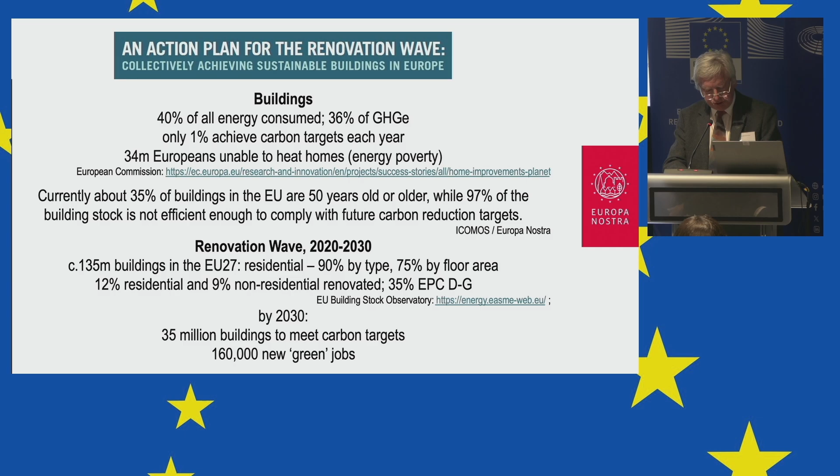I want to give an example. I trained as an architect, worked as an architect, worked on urban regeneration, worked on a reasonably wide range of projects. But my frustration as an architect was that I needed a client who had empathy with what we were trying to do, and quite often that was missing. So eventually I crossed the fence to become the client, and tried to change things from the other side. This is an example where I felt the role of architects as creative industries—and perhaps you don't think of yourself in that sense—but as enablers, people who can see beyond the horizons of contracts and projects, people who can see the future, who can see what is possible.

York is an example where you'd think—York has one of the highest densities of protected buildings in the UK—you'd think surely York, we don't need to discuss York, it's going to be all right, isn't it? Well, no. The survey we did looked at the use of this conservation area and the individual protected buildings.

What we found was that about a third of the upper floors of these buildings was either underused or disused altogether. You think, hang on a minute, surely it's where everyone wants to be—the economy, the culture, the community. But the nature of the buildings was such that the physical constraints and the way buildings are valued was an inhibitor to progress.

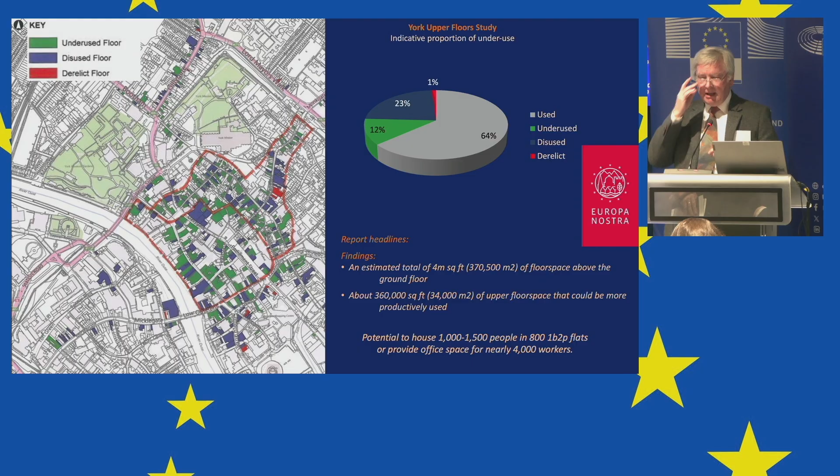So the first point to make is that the buildings have 90% of their market value at ground floor level. That's where the money is earned. So if someone is leasing a building, 90% of the value is at the ground floor and only 10% on the upper floors. So where's the incentive to invest in the upper floors—not just in terms of their use, but in terms of access and all the other things that go with that?

The other barrier we found is that, broadly speaking, the property commercial world is divided into residential and non-residential. And so the commercial world, which is driving the ground floor future, isn't interested in residential, because it's a conflict of two different types, two different communities, two different ways of valuing, two different types of tenure. It was a real problem to try to persuade the market agents to reconcile that differential, to unlock the potential of the city centre.

As you can see at the quote at the bottom, what that meant was that if we could bring that one third of floor space back into use, then we could accommodate between 1,000 and 1,500 people, or we could create employment for up to 4,000 people. These are not small numbers.

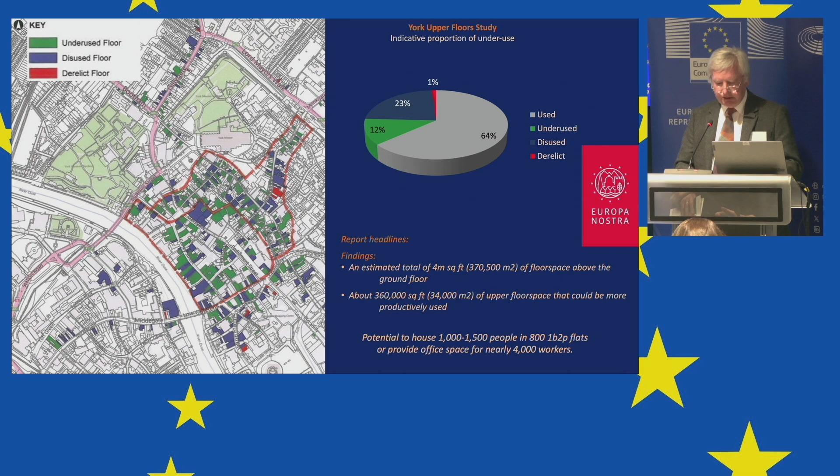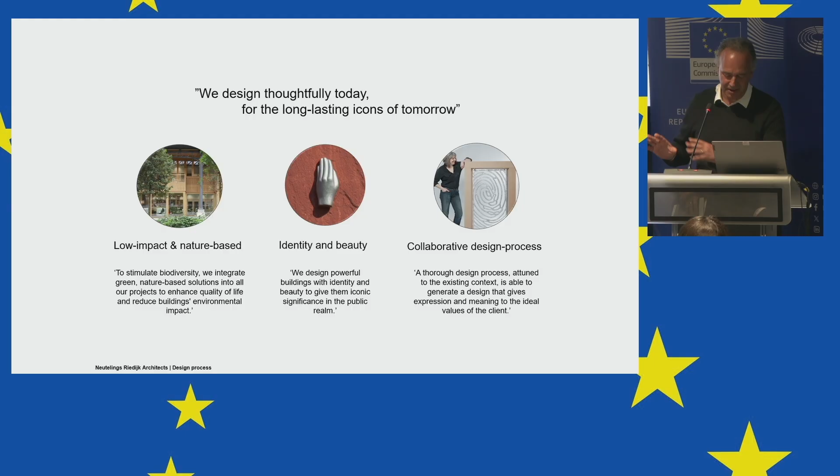I am not going to explain this, since I got the instruction that I had to keep a very limited, concise lecture and speed up.

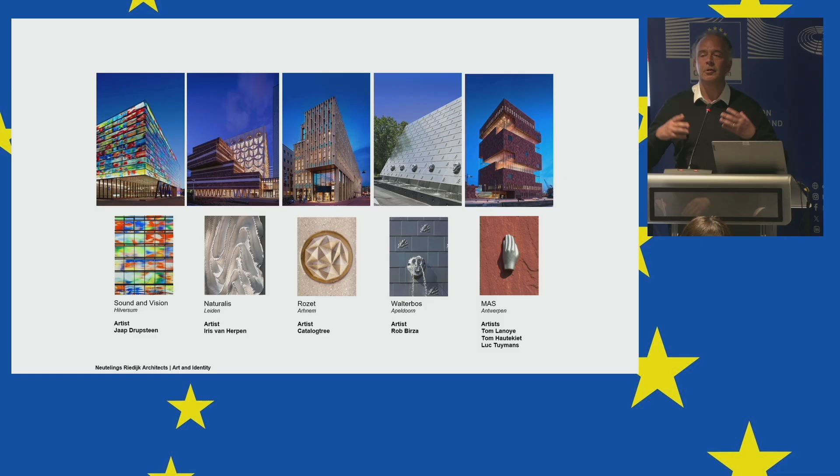So I'm also not going to consider these buildings, which are all new and all about collaboration, in particular collaboration with artists, poets, and other professionals from other fields of expertise, in order to make a building that is grounded in its particular place on Earth.

And it was already mentioned before, also by Olaf in his speech. I think it's key that a building is grounded on one particular place on Earth, and art, poetry and other expertises can help us with that. I'll try to show you that in the coming slides.

Next to that, there are all kinds of ambitions related to what repurposing and adaptive reuse might bring. What is key for us is that the building you find as an objet trouvé, the found object, brings another quality that you couldn't have designed yourself. The objet trouvé propels your thinking in a completely new manner, and offers you design questions that bring you to another level of quality and another level of thinking about architecture in general.

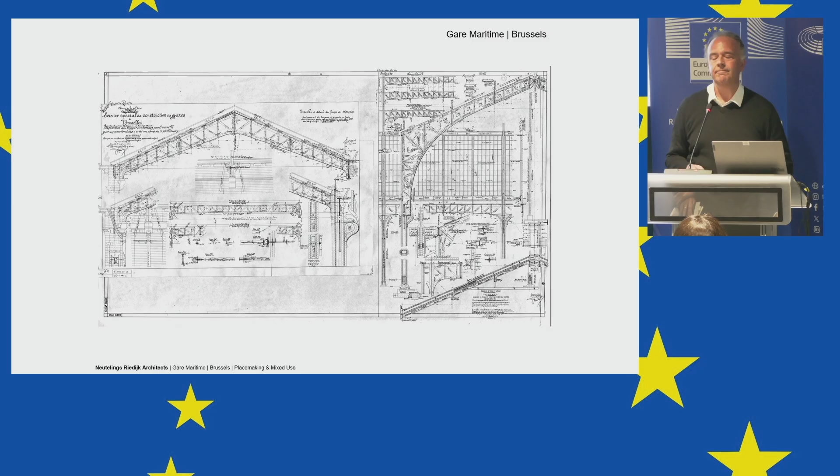As you might know, the Treaty of Maastricht came into power, and there was no reason to have customs declarations anymore for goods shipping into the heart of Brussels by train. So the Belgian Railroad Company decided to sell this former shunting yard and get rid of it, because the ground was polluted, the buildings were in a very bad state, and eventually they didn't know how to use it.

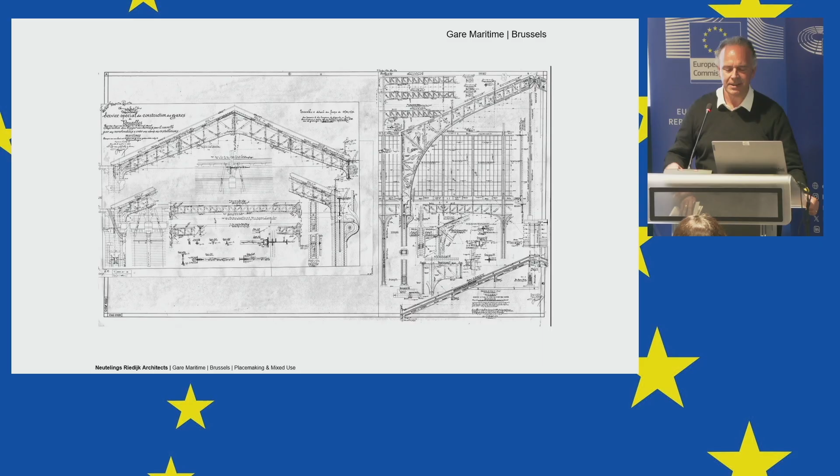So the whole premises is a vast site in one of the most difficult areas of Brussels. That is an important detail you should take into account - I will get back to that. After 1992, nothing happened in this building, so it was in a very, very difficult state.

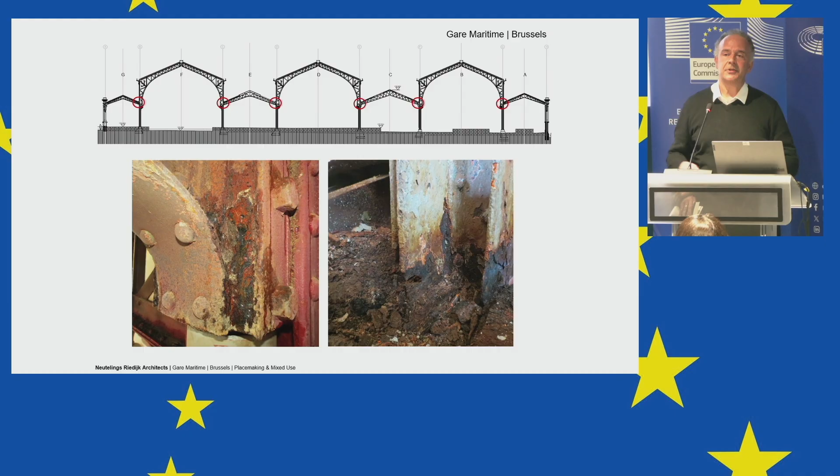The company who obtained the premises from the Belgian Railroad Company is called Nextensa. After years developing other parts of this former shunting yard, they decided not to demolish the building, even though it was considered to be completely demolished, and they started renovating it.

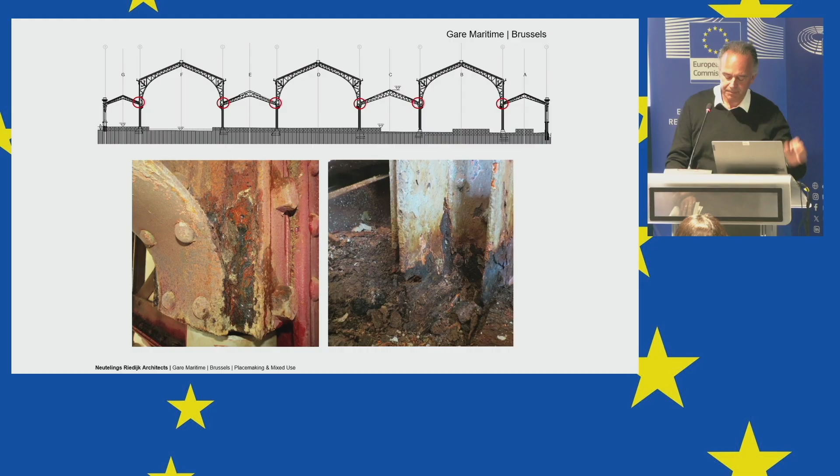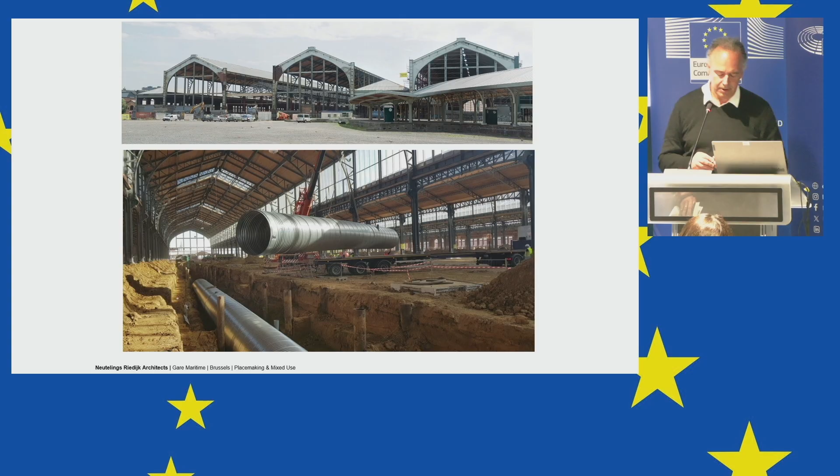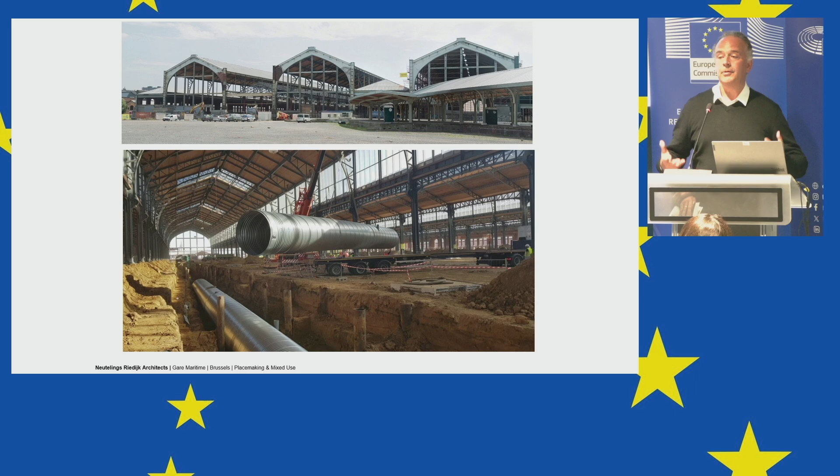Of course the renovation was quite difficult and costly. Since the cast iron structure was very well engineered, the building could not support any additional weight. As you all know, timber is five times lighter than concrete, so eventually, after being asked and winning a selection, we decided to execute everything in full timber, allowing the existing structure to remain without any reinforcement to the existing foundations and structural work.

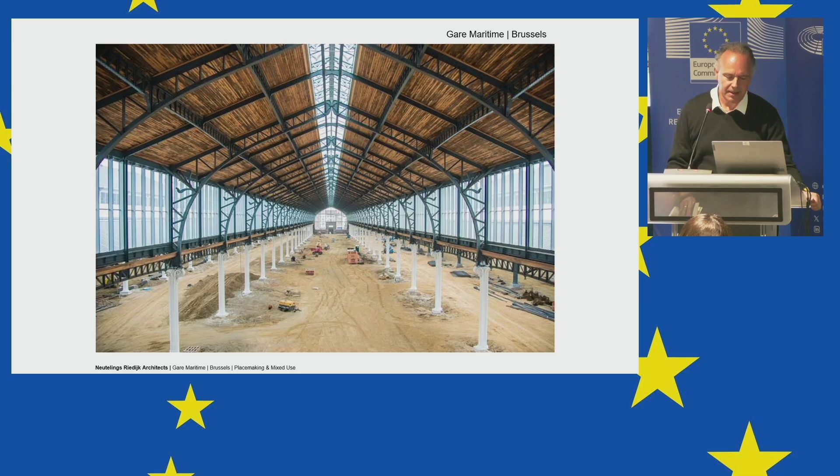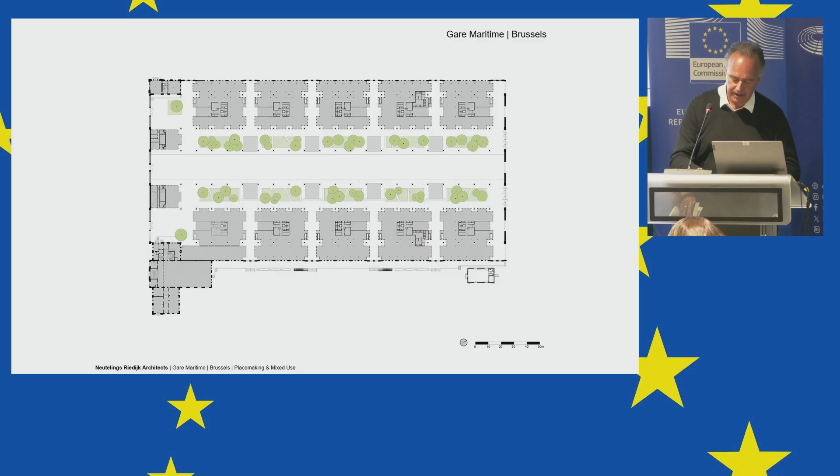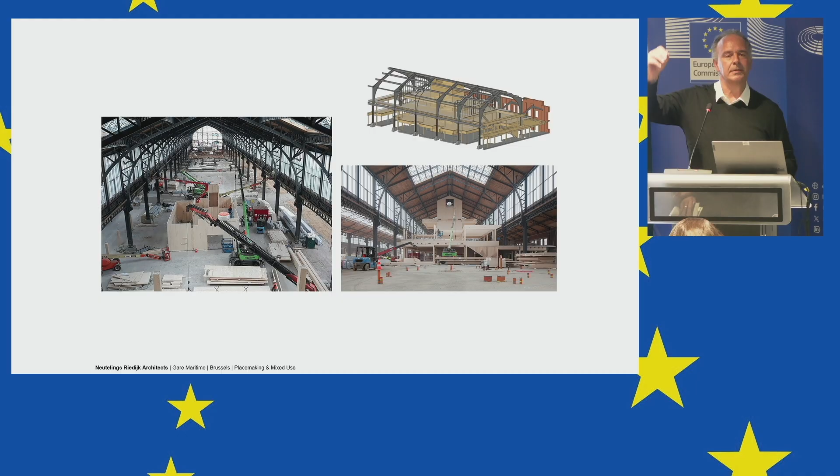So basically what we did: we restored and cleaned these 280 meters of premises. We took away all the elements of the case, stored them, and eventually repurposed them in the landscaping of the building. Then we added 10 blocks, all completely timber-based structures and completely prefabricated. By doing so, we didn't have to move the former roof of the sheds, since you need very large cranes if you would have had a structure executed in concrete.

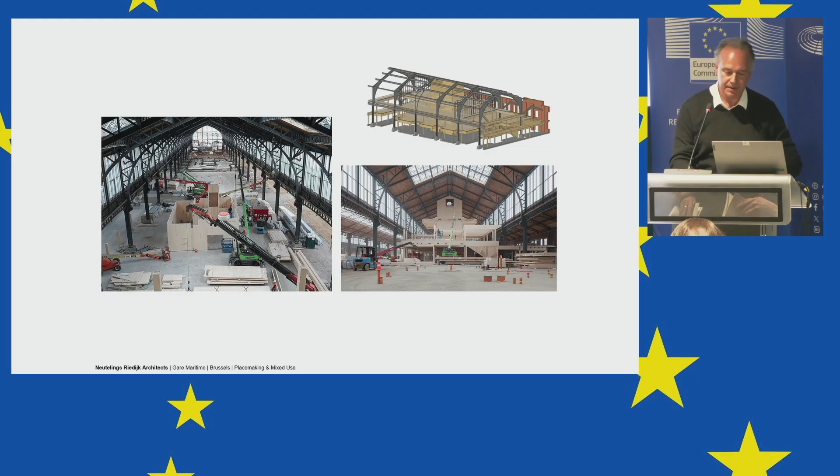Since everything was conceived in completely prefabricated CLT timber, we were able to mount everything like Lego pieces on site under the sheds. And of course, eventually, we also repurposed and renovated the exterior.

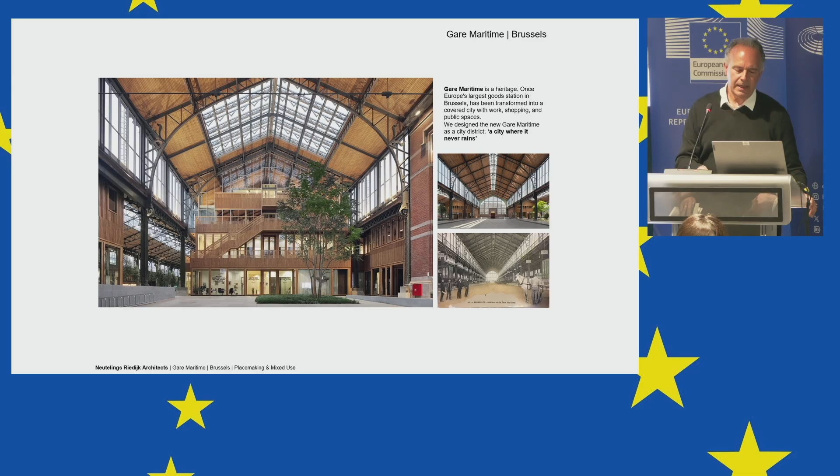What's important is that, as you might have seen on the ground floor, we had these 10 blocks positioned in the side bays of the former station. That allowed us to create this very generous middle bay as a covered square and as a new public space.

For this very difficult neighborhood in the heart of Brussels, the main objective was contributing this new public space, besides adding 50,000 square meters of offices to the premises. We added this substantial new public space.

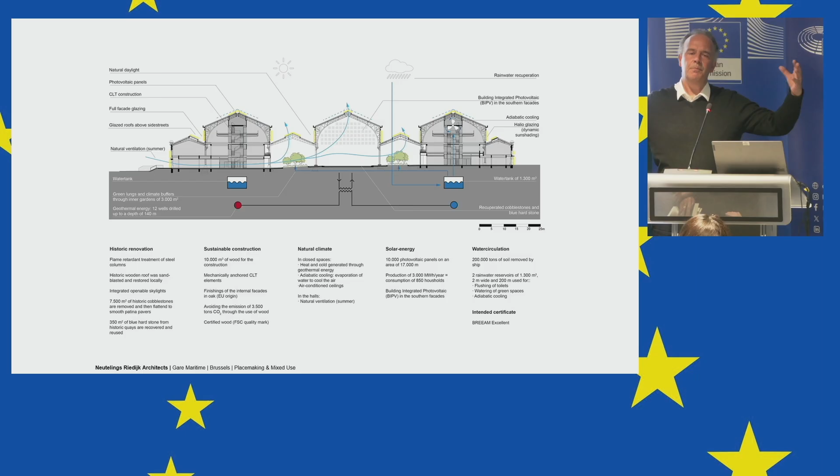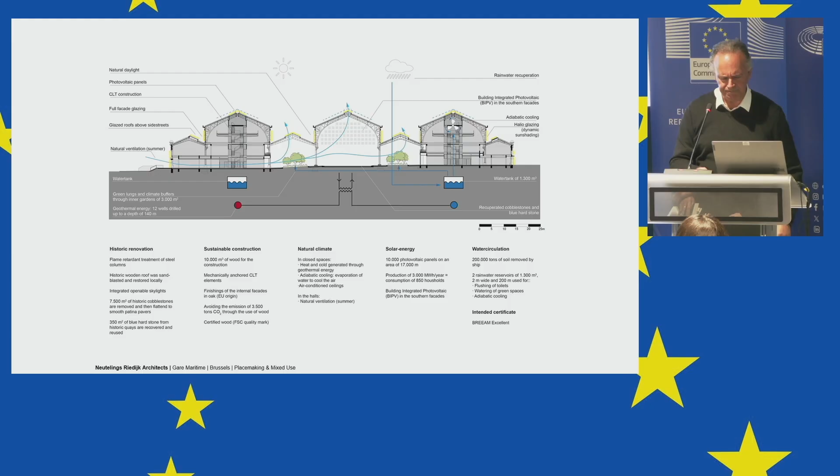I will not dwell upon the sustainable performance of the building, but as you can imagine, by repurposing these 7 sheds and allowing for these 10 new timber buildings in it, a kind of new energy-positive use of the soil and the surrounding area came into being.

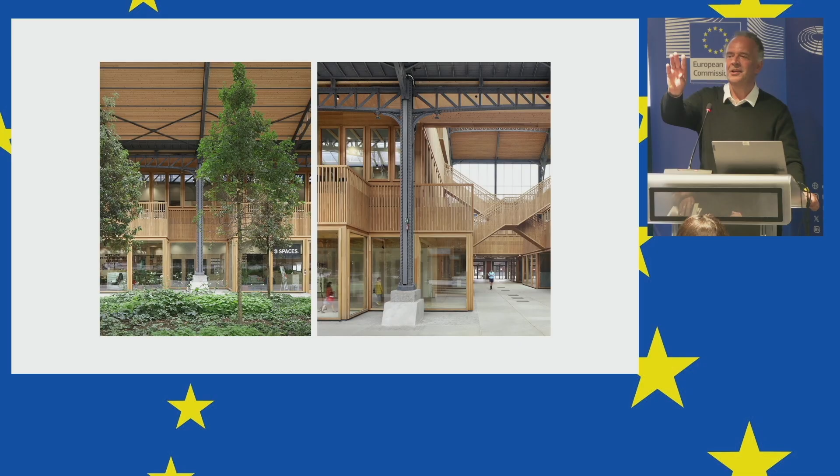Funnily enough, I realized this morning that the pictures I'll show you first were taken during the COVID pandemic, so the building seems completely empty if you look well. So I'm saying, yeah, we made this new public building and there's nobody there. As you might see, the people are wearing masks in this picture.

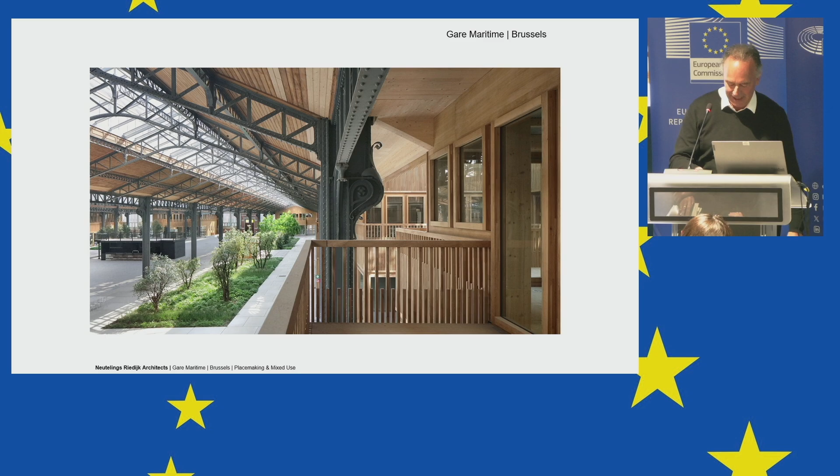Anyway, so the full station was refurbished, and what's very interesting right now is that it's this kind of new destination in Brussels. Since it's part of this very difficult neighborhood, they needed new public space. By making this very large, generous, covered open-air space, which is open 24 hours a day and receives everybody, a new public destination came into being.

As of course the exterior is beautiful, you should visit it. I'm rushing a little bit.

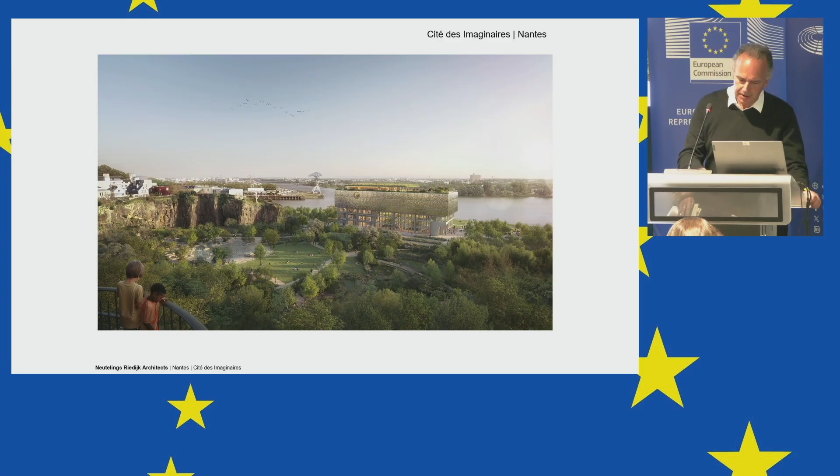So the next building is a former mill in Nantes. It's again a competition we've won in Nantes, repurposing a very large industrial mill where all products produced along the Loire River were shipped to and processed, and then from this quay along the river were sent into the world.

The mission of repurposing this building was also to eventually create a new museum dedicated to Jules Verne, among others, in this building, celebrating in 2028 the fact that he was born 200 years ago.

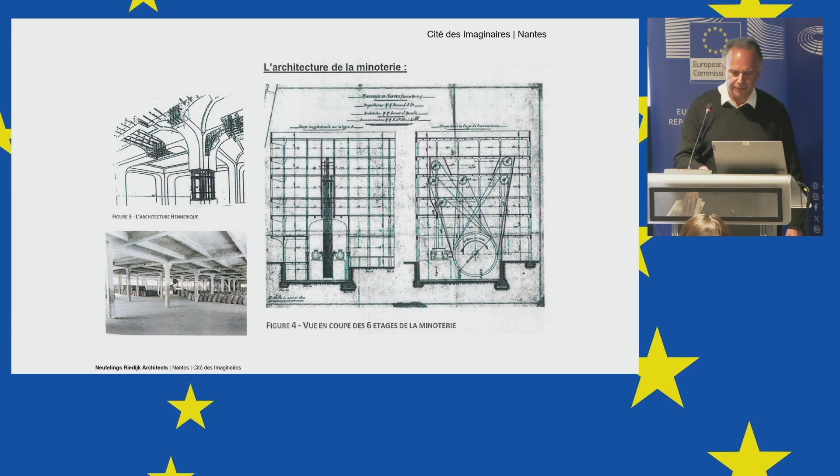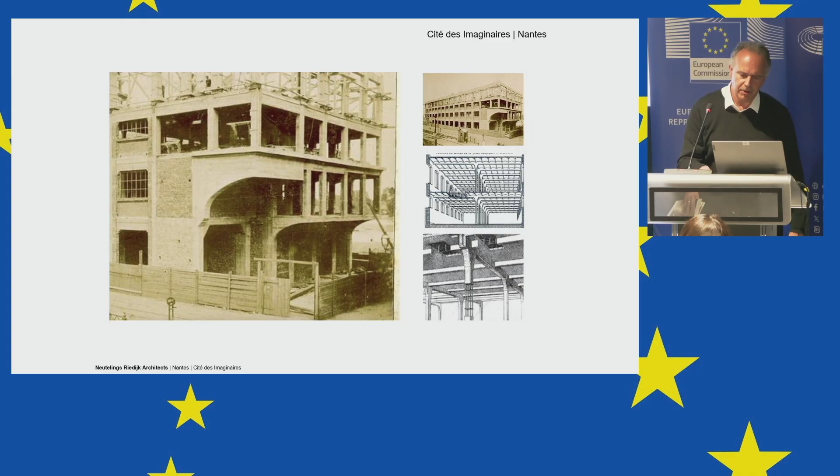The mill, as I said, was produced by this structural scheme or invention of François Hennebique, but the mill is currently in a very dubious state, although it was a beautifully conceived building with gigantic cantilevering over the railroads. In the 70s, they decided to cover the building with aluminum sheets, and they also tried to repurpose it as an office building.

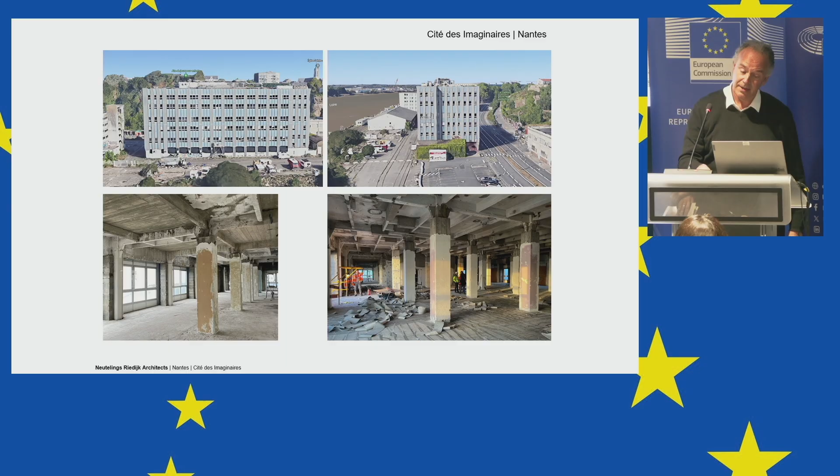The former concrete structure of François Hennebique was covered with extra concrete without actually addressing the difficult nodes between the structural elements. Since Nantes is in a seismic area, the fact that they didn't reinforce the structure in the 70s causes quite some challenges currently while we're renovating and restoring the building.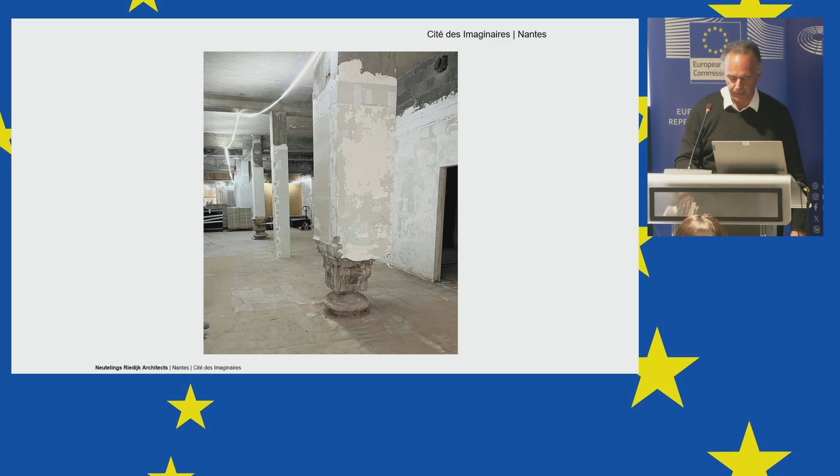While we're doing an inspection, all kinds of beautiful details come to the fore of the former structure of the mill. So the reason we won this competition is that we make a building above it.

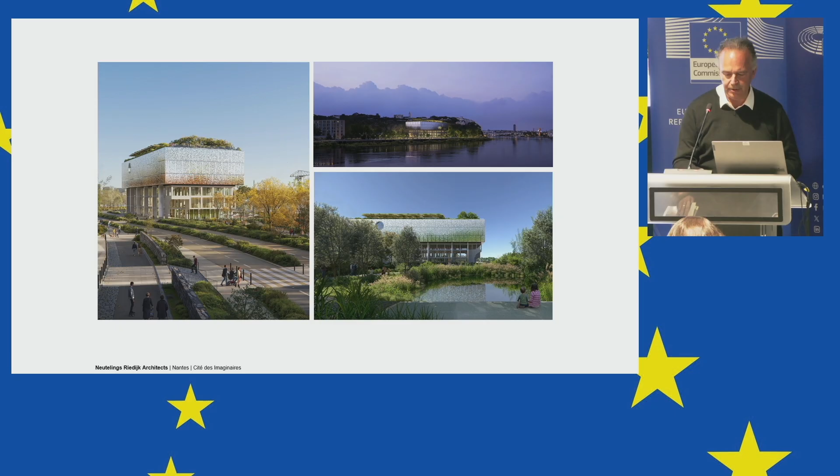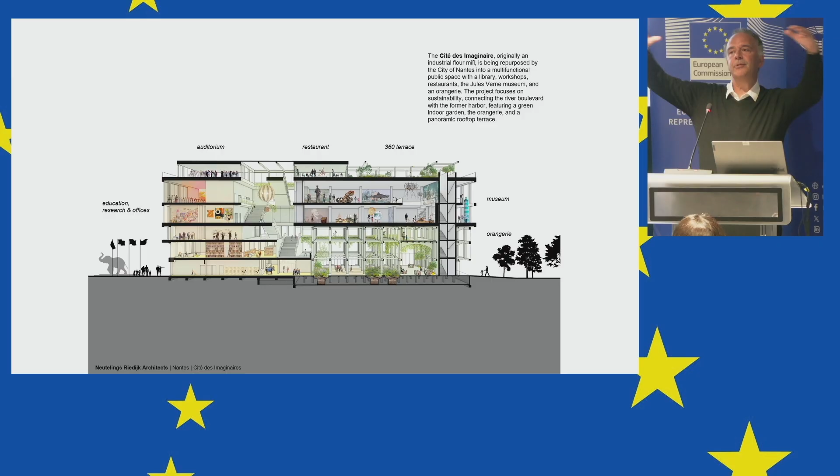We repurposed the structure of François Hennebique as a new garden called the Jardin Hennebique. This new garden forms the heart of this building, whereas the museum for Jules Verne, the Cité des Imaginaires, a large public library, and a new terrace overlooking the Loire come around it and above it.

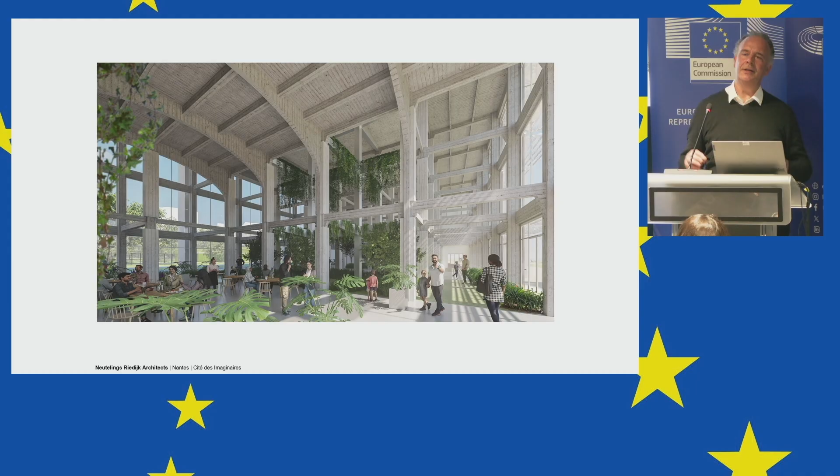So again, repurposing is possible by coming up with a strategy not working within the building, like in the case of the Gare Maritime station, but in this case, working above the building with a lightweight structure.

This building, the third building I'm going to briefly talk about, was a former petrol headquarters. It's Petrofina, part of Belgian colonial history. Petrofina is now part of a large French resources company, as they call themselves today.

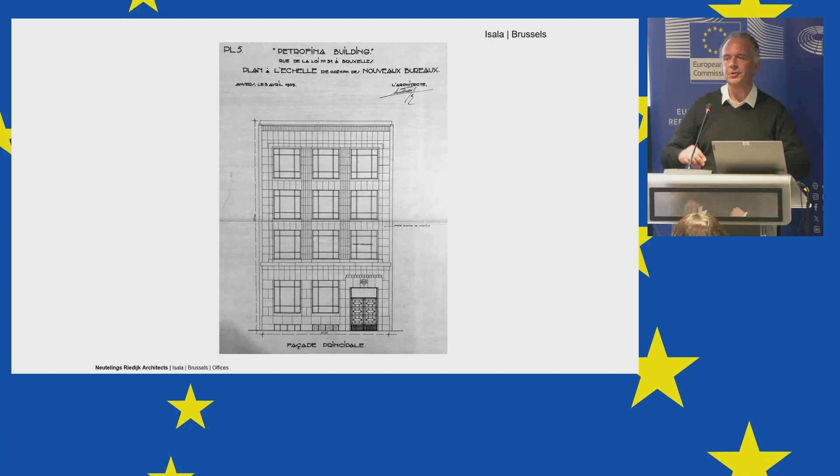This building was being considered for demolition because it wasn't necessarily considered a monument or heritage. But we concluded that the building conveys an important part of Belgian history, and also of the way Belgian history relates to exploiting natural resources. So we concluded we should keep the building.

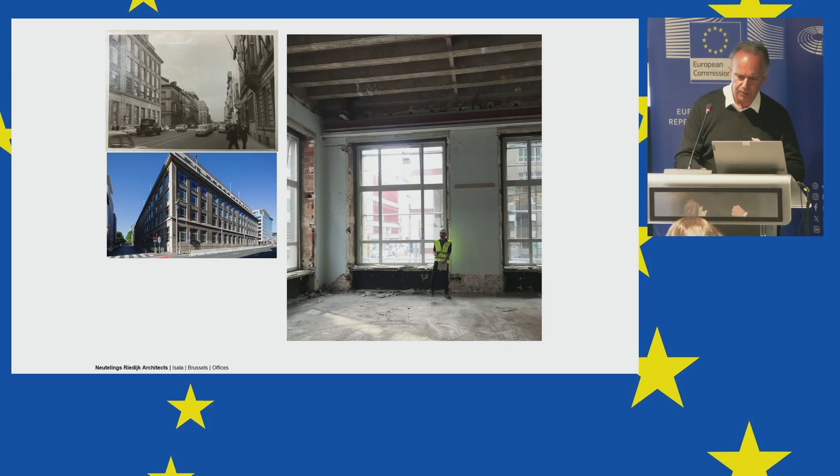It's on Rue de la Loi, one of the main streets in Brussels, close to where the European Parliament and the European Commission are. And we decided to build around and above it.

As you can see in this section, the former concrete structure is kept, and we put a new timber building above it and against it. By doing so, all of a sudden a complete new use is possible.

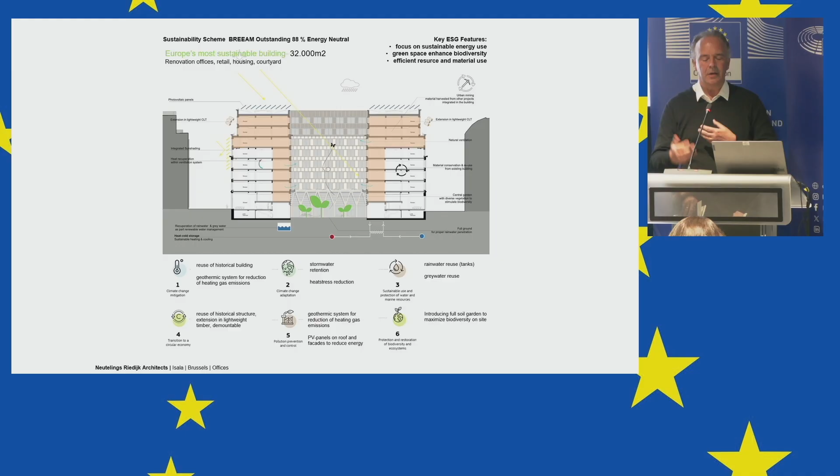Previously the building had a kind of W floor plan. So we took away the middle bay and expanded the side bays with timber, and by doing so the building could cater to contemporary office use and housing, because in Brussels a functional mix of both housing and offices is mandatory.

And we created this heart of the building with open soil that also helps enhance biodiversity and climate resilience in the inner city of Brussels.

Two last projects are not in France or Belgium, but in the Netherlands. This is a former orphanage. This is the real monument—or these two projects are about a real monument—because when we started with the Gare Maritime, it was not considered a monument either.

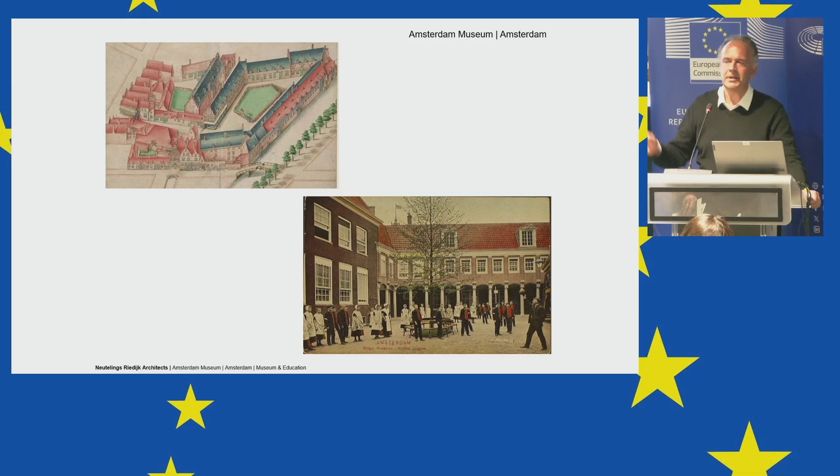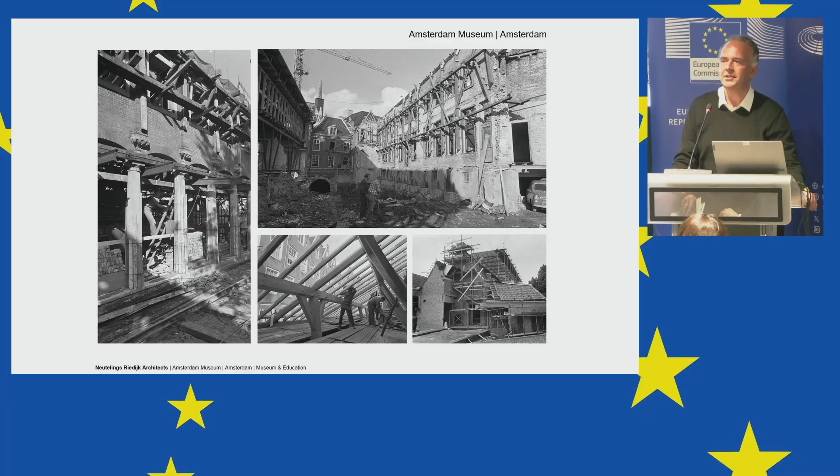In the 60s, as you might know, Aldo van Eyck built this seminal orphanage outside of the city, and this building became empty when the new orphanage was introduced by Van Eyck on the outskirts. In the 70s they started repurposing and changing the building, and based upon those changes, we are now recreating the city museum.

Again, we're intervening in the heart of the building with a very lightweight timber structure. As you might know, all buildings in Amsterdam have a foundation on wooden poles, so in order to avoid the buildings disappearing into the mud, we have added new timber structures.

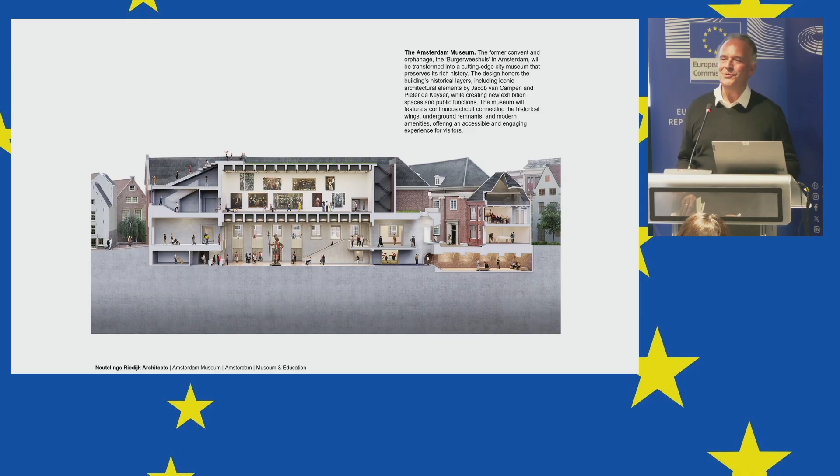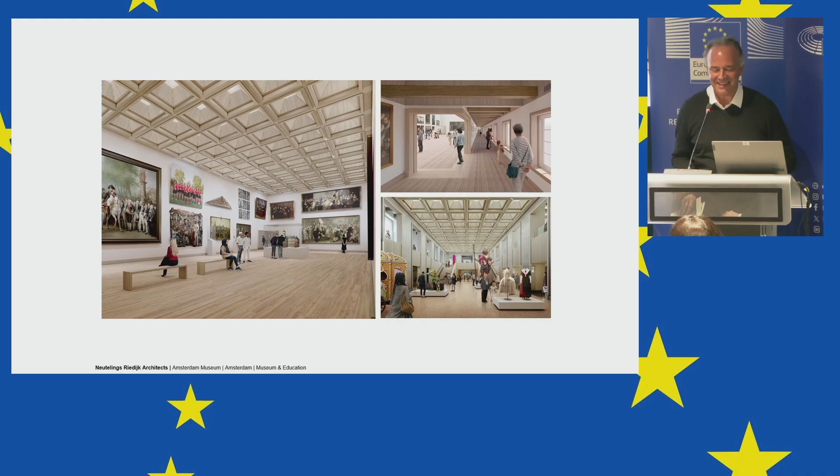In the heart of the building we create these large spaces showing the night watches. I guess you all know Rembrandt's Night Watch, but in the time of the Republic, every 10 or 15 years there was a new night watch, and they needed a painting, a picture, for that matter. These paintings are still in the collection of the city of Amsterdam.

Then the last building, rushing through my presentation today, is in fact the most atypical building in this manner, because it consists of a lot of new built structures as well. The reason I want to show this is, again, about something we've dwelt upon previously: it's about creating local identity.

I thought this was interesting to show this morning, because this was a competition we won in 2008, and it was highly disputed. As you might remember, due to the financial crisis of 2008, 2009, 2010, the citizens of the city of Deventer thought it was not worthwhile investing in a new town hall, and that the city government should not spend money on new built structures.

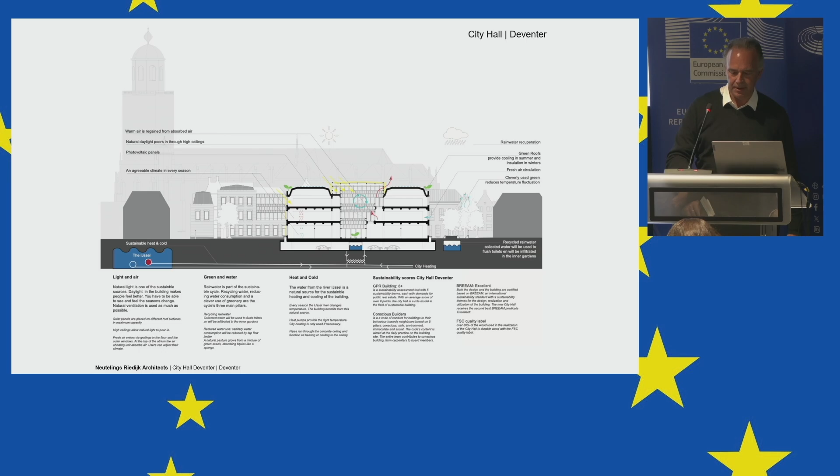So you can cross the building, and by crossing it you enter into a set of courts - this is one of the courts. By creating these courts, and also creating courts within the building, a large part of this Deventer inner city, which is primarily a 15th and 14th century fabric, was completely

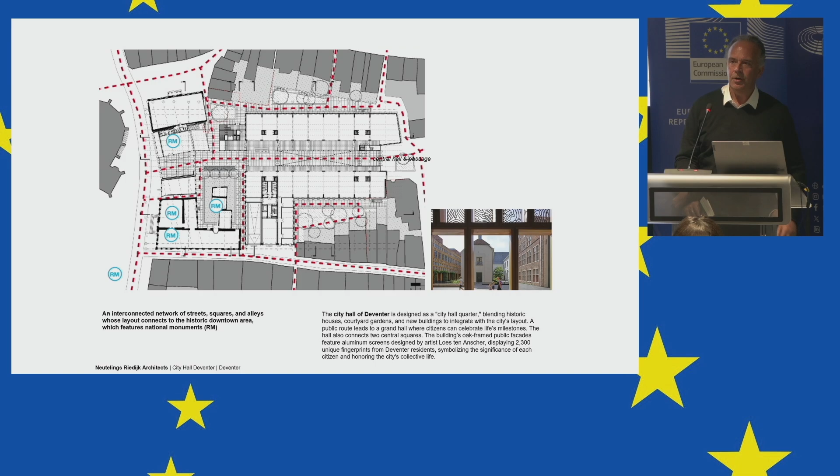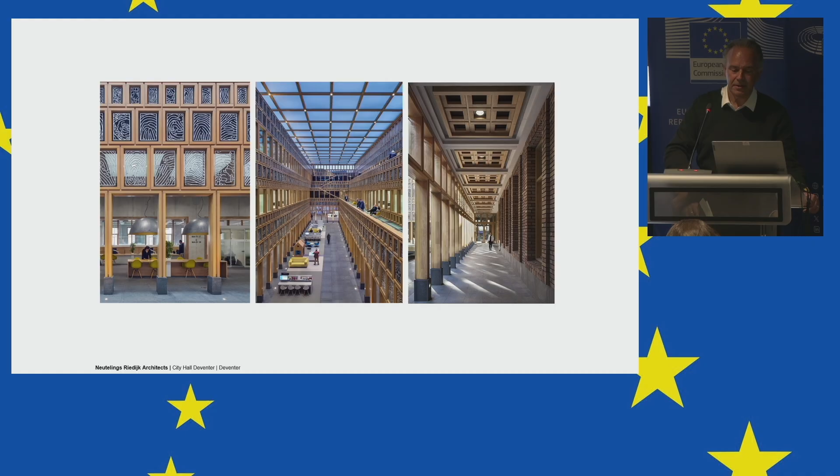rejuvenated and came into being. Here's the slide where you can see the set of courts and back alleys that connect all these fragments of buildings. And the reason why eventually this building was accepted and embraced by the people living around it and in the Deventer inner city was that we held a large competition with an artist from Deventer, and this artist won.

Her proposal was to have a kind of community project integrated into the building. The community program, or community artwork, consists of fingerprints of more than 2,000 citizens of Deventer, randomly selected from the public administration.

And the fingerprints convey the notion of community, of being together, the importance of local politics, the importance of what the city administration does for you, and in a way also convey the notion that repurposing buildings, art and architecture is very important in order to make your city great again. Thank you, thank you.

Thank you, Michiel, for such an enlightening presentation and for fitting so much into 20 minutes. I think many of us will be travelling to see those projects - they're all wonderful.

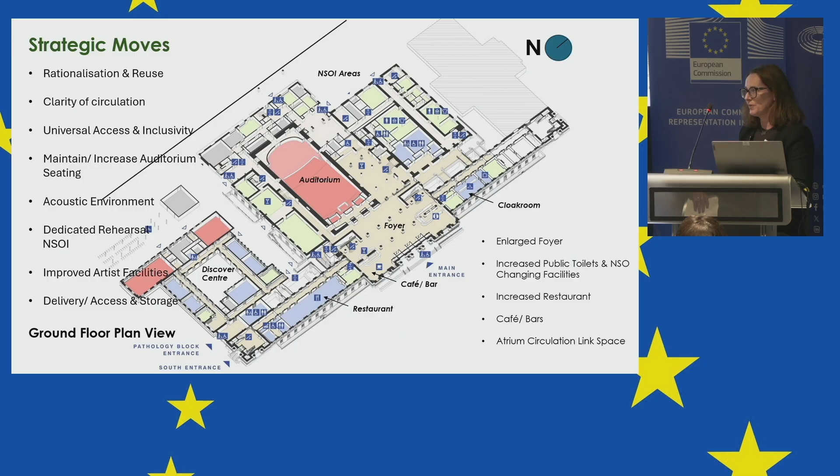Just moving on. Looking at some strategic moves, the key thing essentially at the moment, the National Concert Hall occupies about 9,000 square metres of the site. When we're completed, the building itself, the concert hall will be over 20,000 square metres. And of that, there is a new intervention of about 5,000. So the majority of the building is about adaptive reuse.

So it's the rationalisation and reuse, the clarity of circulation, the opening up of the building to reveal what it's really all about, because a lot of the areas are closed, you won't have seen them, they're lying somewhat in dereliction, and so there's huge opportunity there.

So this is what we're trying to achieve. Obviously, the auditorium is central to that, and that's our beginning. We have to bring it up to standards in terms of compliance with fire and universal access, and that's the same strategy throughout the campus for equity, for all, and to bring the public in, that the concert hall doesn't want to be seen as an elitist space, that everybody is welcome. And the architecture has a big part in that.

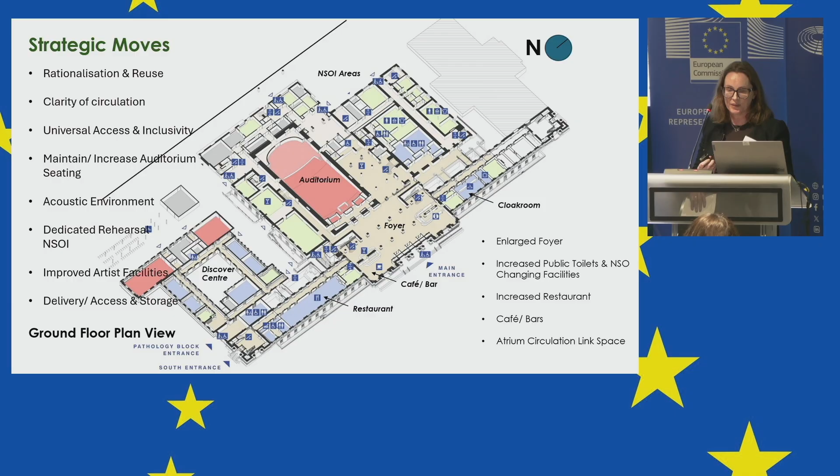So in terms of the acoustic environment, creating dedicated rehearsal spaces, improved artist facilities, delivery and access. We have to look at the pragmatic side of delivering a project that will work. We have a huge amount of services that have been put in ad hoc over time. So it's about rationalisation of that and creating a future use that's really authentic, that people can come to and enjoy and appreciate. It's all about music, and the National Concert Hall is the centre for music, but it is also about public use and what brings with that.

So it's just about talking about opportunity, that awkward relationship between blocks that were never intended to stay together, because the Butler building was built and it was intended that the building in the centre would be demolished so that there would be future quadrangles and a more traditional university campus. But obviously that never happened.

So what we're proposing here is the relationship between the front Butler building and then the central 1865 block is to open up what is currently a flat roof structure in between the two structures, allowing natural light and volume, and also to be able to articulate yourself in the space, because that's one of the key things in the concert hall. You go in there and you could be anywhere. It's very difficult to understand where you are and to orientate yourself.

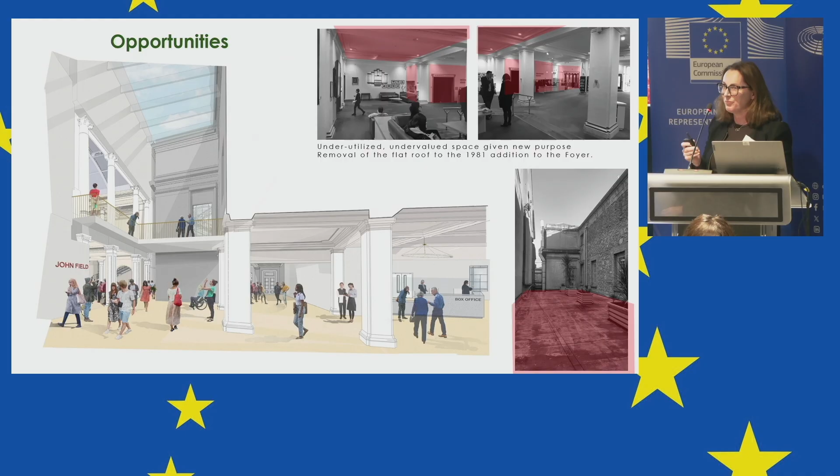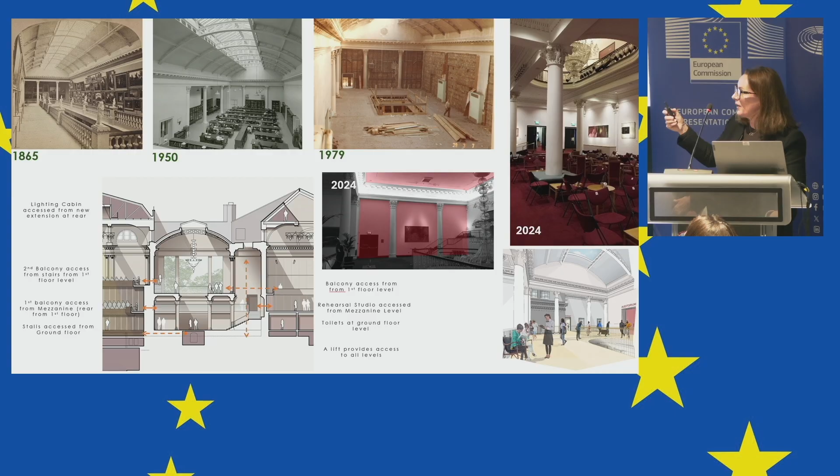So we're looking at how we open the areas out, bring back in the natural light. In the corner image, you can see there, we're going to be opening it back out so you can actually, we'll have new roof lights, and the cast iron trusses are still in place.

Thank you, Sarah. It promises to be transformative, I think, for musicians and music audiences into the future. I'd now like to invite Gerard Carty, Director of Grafton Architects. Gerard is going to outline the work Grafton Architects are undertaking at another national cultural institution, the Crawford Art Gallery in Cork. Thanks, Gerard. I think your slides are in the wrong order.

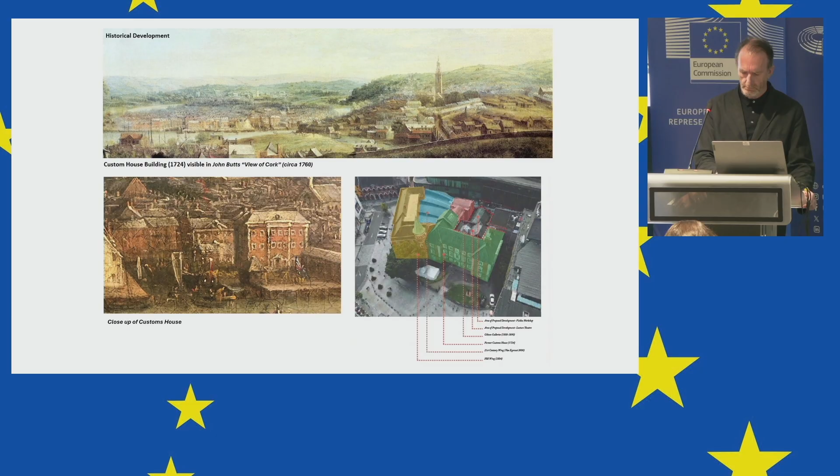What's very interesting about the gallery is that it's got an intimacy and a domestic scale which reflects the provenance of the collection, much of which comes from private individuals, donated from their hallways and living rooms. So some of the spaces we feel are very appropriately scaled to the nature of the work on show.

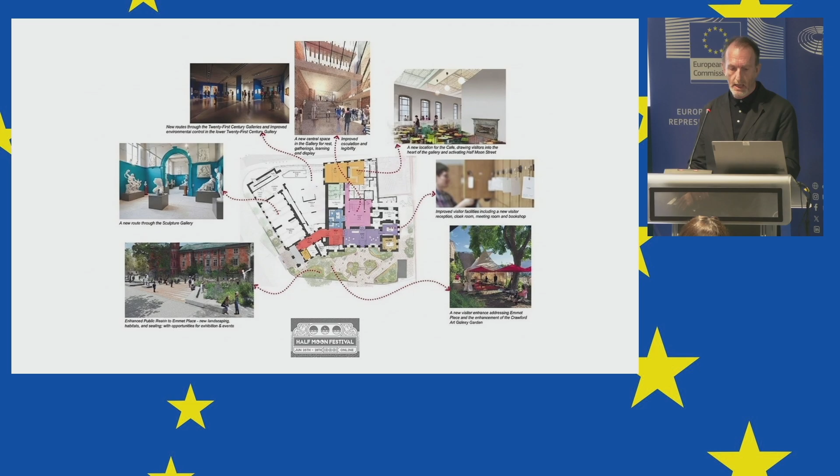To provide the much needed additional space, we approached the task in a manner of acupuncture, taking pressure off the existing constructions by inserting a new component housing the supporting uses, and in the process releasing existing spaces in the historic fabric for the enjoyment of the public and for visitors.

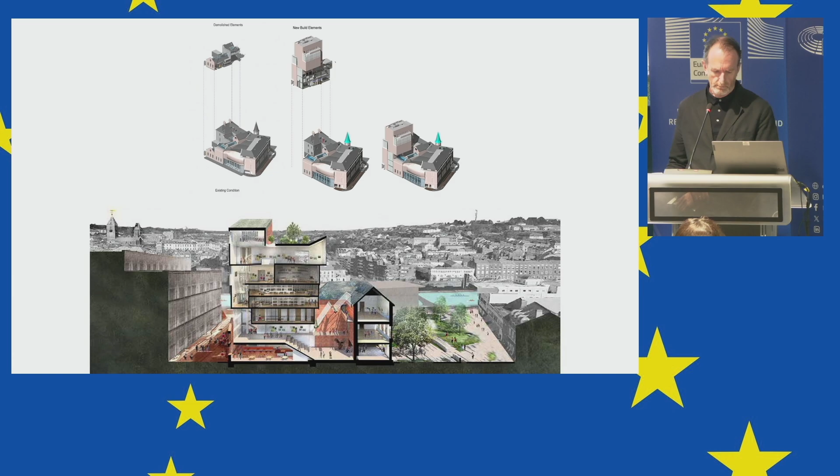On the ground floor, a relocated main entrance replaces the former cafe, which is now accessed from a transformed garden and threshold space on Emmet Place, which we're designing with Bernard Seymour Landscape Architects. This is a very important component in the accessibility to the gallery, and it recenters it on Emmet Place.

The cafe is relocated to animate Half Moon Street at the rear. That's a quiet laneway, which will provide another entrance to the building, making it more porous and accessible.

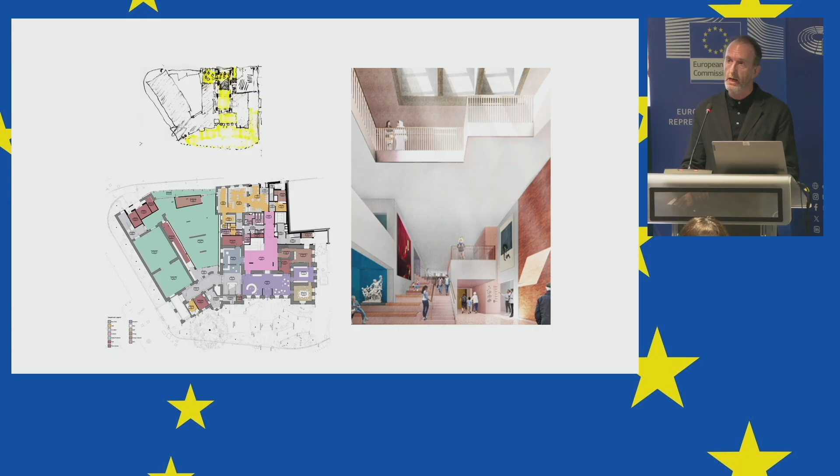The historic facades will be restored and upgraded as part of the conservation and environmental works, and here we're working very closely with Shaffrey Architects, extending to the 21st century wing by Erick van Egeraat, which we're also approaching as a conservation project. The new extension is centred on the Custom House and marks the main entrance, and is inspired by the pattern of previous architects in 1885 who sought to harmonise the various parts of the building. We're proposing to use a similar brick for the new extension.

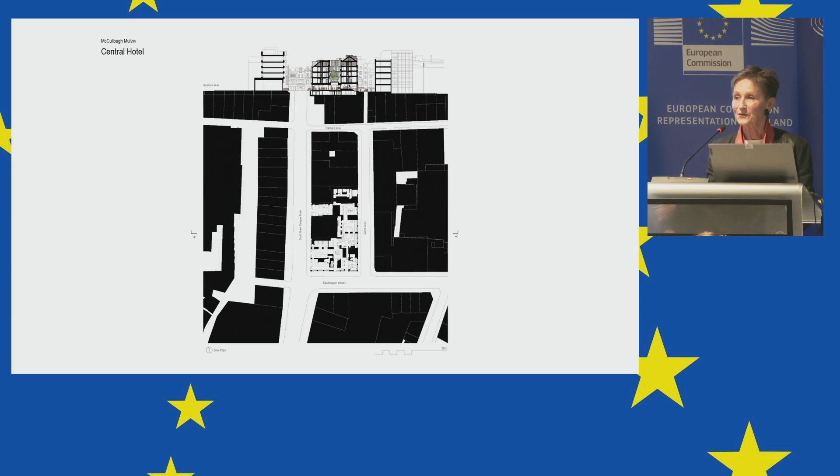So these are fluid spaces where you can pass from one street to the other without anyone challenging you. So from Dame Court, say, to South Great George's Street, where you can see if you know anyone as you go through, or you can sit entirely alone in a crowd over a quiet drink. So this is what public culture does. It makes a place for chance encounters.

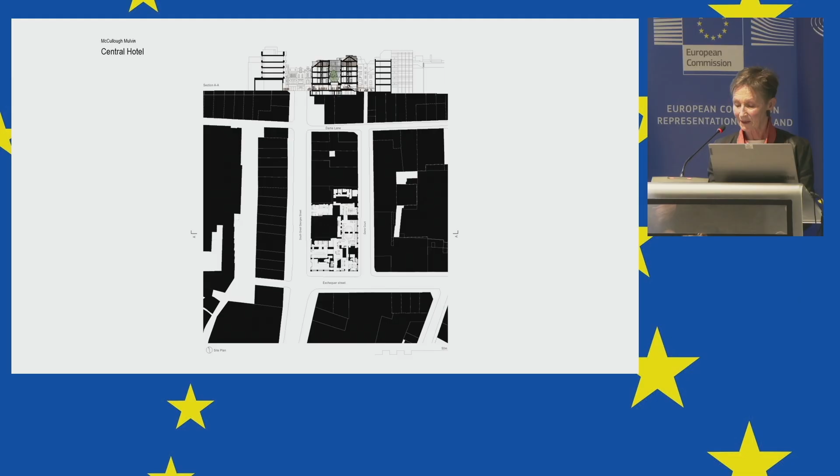If you look at the plot lines, they were really important to us, and they're a relic of those former shops. The black double plot in the centre here is Yamamori, which wasn't part of our brief, it wasn't part of our site. Our clients didn't own it, and we had to work around it in plan and section.

And the plots gave us varied rooms, lots of permeability, lots of doors, and as I said, you slip from one plot to the next quite seamlessly, and each one is marked with the shadow of a wall or an opening. So we worked at all the edges.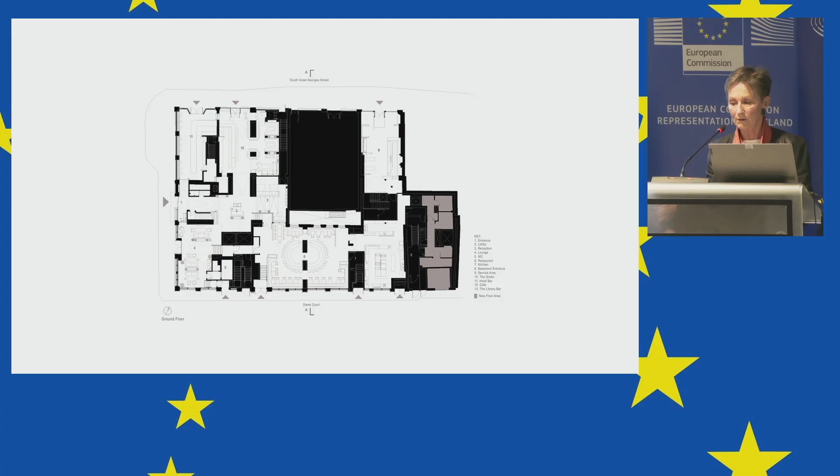We brought light down from the courtyard above, very conscious of its importance as a huge city block. So it's a piece of the cultural life of the city, really.

And especially when you come to the library bar, which is on the bottom slide is the first floor slide, the top one is the fourth floor. And the library bar is really where arts and media people used to meet in its old manifestation. We had to persuade the Hoxton people and our developer clients to keep it as a Dublin icon.

Obviously there was pressure for bedroom numbers, and they had no idea of its importance in the city at all. So, but once they knew it, that prime little perch overlooking the two streets was restored in order to have a similar appearance to its ghost predecessor.

And then on the fourth floor, intensifying the plan by finding an appropriate place to stitch in an extra story without taking away from the beautifully worked scale in the city. So we built a new level behind the front slope of the South Great George's Street facade and a full new roof pitch over Dame Court.

So in key streetscape views on South Great George's Street, the additional volume isn't apparent at all, and then it becomes a contributor to the skyline as you move down Exchequer Street.

On Dame Court, then also, we built a new vertical slot as a bookend where a single-storey building had been, and then a glass bridge just completes the circuit across the courtyard.

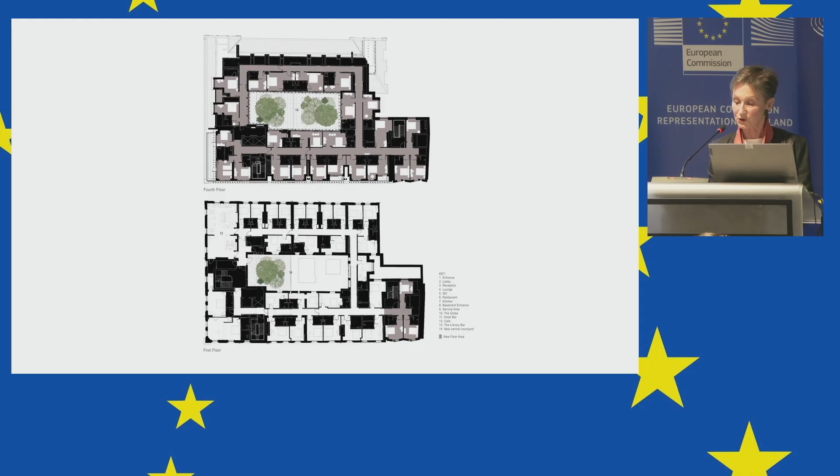In terms of new materials, we wanted to clearly identify these as new: metal cladding which blended with the red brick. We set it back from the edge a little bit, very precisely, to create balconies and new windows, carefully chosen in colour from street level to roof, using this new perforated material. We also added planting to the courtyard, which had a big impact on improving the amenity for bedrooms.

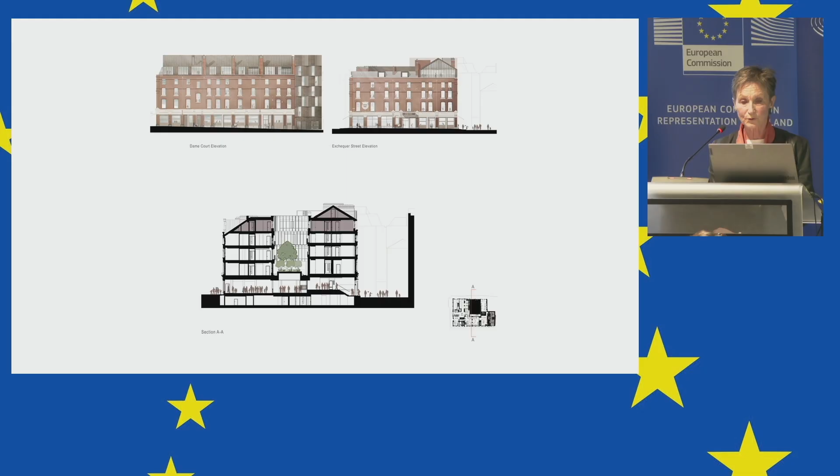It's like as if you were living in a bridge. We liked that fantastic contrast between the authenticity of the trusses and the sort of make-believe of hotel bedrooms. But before we got to that point, we had the meticulous paring back of the 1960s, 70s, 80s refurbishments, getting back to the original timber partitions and trusses.

It was an enormous challenge to bring this up to brand standards of acoustics - in other words, so you can't even hear a plug being put in a bedroom next door. It involved enormous amounts of time on site, even with our excellent builders Duggan Brothers, who really understand conservation and why it's important. Following a total refurbishment of all the mechanical services, insulation and so on, we achieved a BER A3 for the whole building - it's very well insulated, acoustically very strong, and very carefully refurbished.

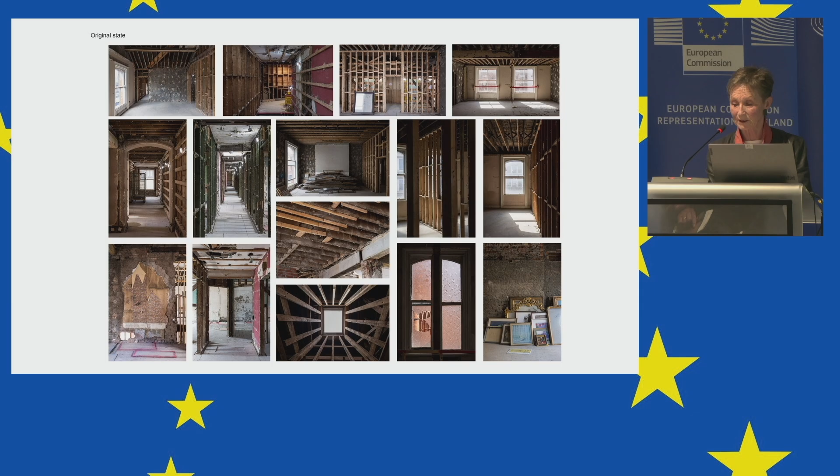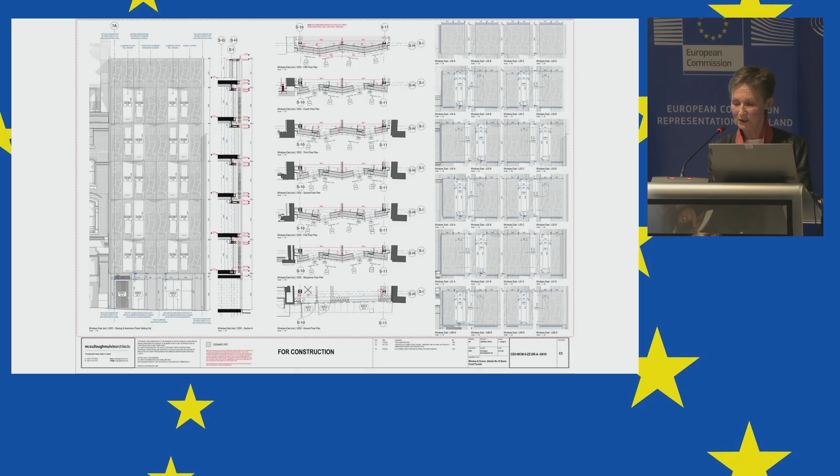Finally, the sliver of the building on Dame Court - this was a single-storey shop where Inside used to be, if anybody remembers Inside. We made a new profiled metal and glass facade, six storeys over ground, folded in opposite directions on each floor, with windows stepped out for privacy.

You can see in this slide what that looks like - each layer goes in the opposite direction to the one above it. We had great fun with the perforated metal facade. We took the Rocque map of 1756 and mapped out South Great George's Street and Exchequer Street, abstracting them into a metal plate as a series of pixelated dots for buildings and spaces for streets.

That transitioning is now a little plaque on the outside of the building so people can understand what we've done there. What I like is that the modernity of the facade is really grounded in the sense of Dublin City itself. And all of this was achieved with very sympathetic support from Dublin City Council's Conservation Department.

It's lovely to see Niamh here this morning talking about projects.

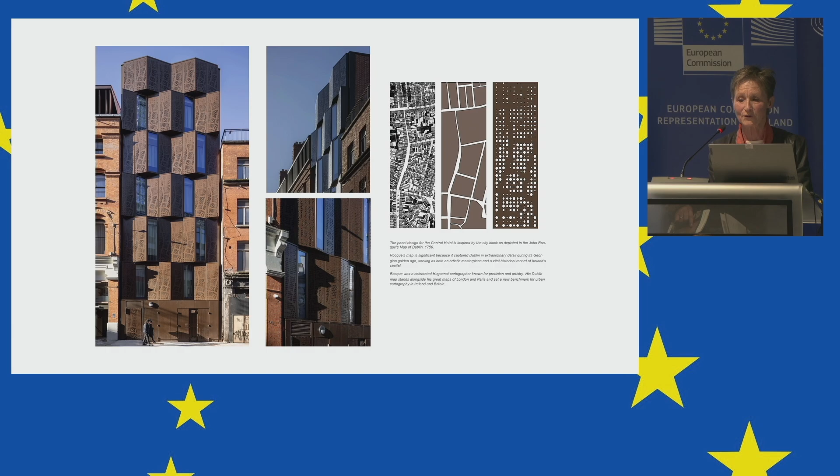It is important to say, as a commercial project, it was very hard to actually achieve all of this - really, really difficult. But at the same time, it's so fantastic to have been part of something that restores a building almost so that nobody knows anything has happened to it, and it has just become part of the city again - a very anonymous part of the city. So thank you very much.

Thank you, Valerie. It's really interesting to get an insight into a historic private rather than public commission, and to see the detail of what you've achieved in this space.

I'm going to ask Nikki, do we have time for questions? No.

I'd just like to thank everyone for such insightful and informative presentations, and to say what's striking is the absolute added value you are providing to the public by giving new life to these buildings and spaces, and delivering in a very tangible way on European, national and regional policies for architecture. I'd like to ask Valerie a quick question, if that's okay.

Valerie, you've been a very vocal advocate for reuse and adaptation, not only through your design practice but through your writing, and more recently your exhibition, The Reason of Towns, with the Irish Architecture Foundation, which travelled nationally and to Scotland.

So you might tell us a bit about that, given its relevance to our conversation today, please.

Thanks, Fionnuala. Yeah, I think the idea was based on work I had done a long time back, which became a book called Approximate Formality. That was really about charting the amount of fantastic but wasted capital we have in our towns. We have many, many really beautiful planned towns in this country.